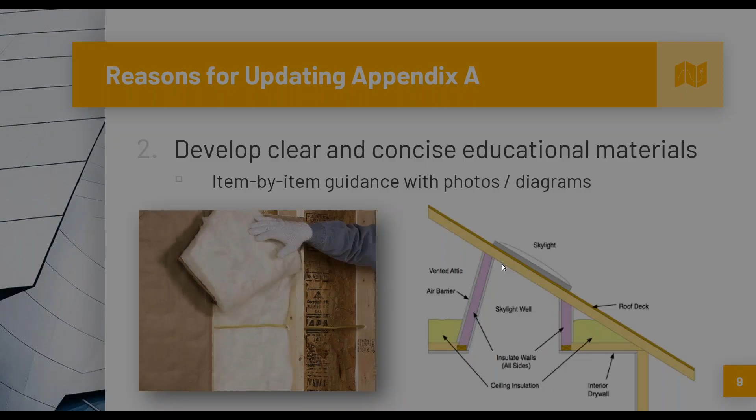Now, in terms of educational materials, the insulation industry is committed to creating an informative guide that aligns with the requirements of the updated standard.

This format that we're proposing will make it much easier to create that guidance for each of the installation types. Item by item, we provide pictorial and additional informative language to the requirements. Things aren't subjective within this update.

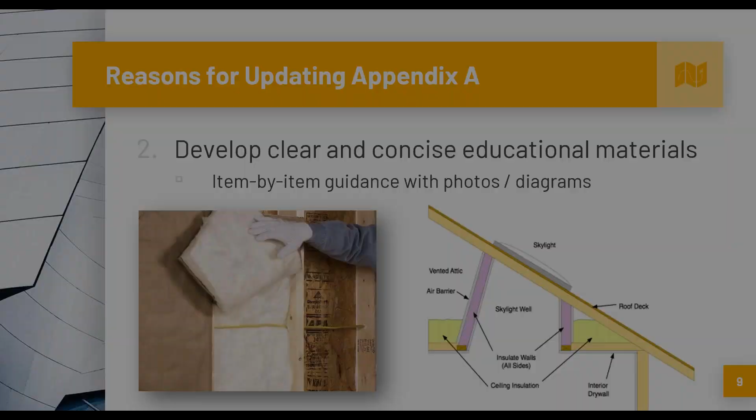And then lastly, in terms of alignment, moving to a pass-fail, properly installed, not properly installed designation, along with language changes for the installation types, will bring it more into alignment with both manufacturer's instructions and ICC requirements. Like I said, that third point, bringing things more into alignment. All right, so those were the reasons that we had behind the changes that were being proposed.

I want to provide you with a little bit of background on how we went about making these updates. So we put out a notice that we were making an update through RESNET and brought together raters, builders, and product manufacturers to draft the new sections. So we created subgroups that were focused on drafting requirements for each installation type. And we met monthly as an overall group to report out progress from each of those subgroups.

So Robbie did a great job of creating some guiding principles for those subgroups to use as they formed their requirements. It really helped improve consistency between each of those sections. And of course, we tagged existing resources that I'll talk more about in a second here as guidance in creating each of those sections as well.

In terms of makeup of the group, we had over 30 participants that consistently came to the meetings: builders, raters, energy efficiency organizations, installation representatives, and even ICC staff would consistently join. So it represents a pretty good cross-section of the industry. This standard that's being proposed was not written in a vacuum by one party, but was a collaborative effort.

And then in terms of existing resources that we used in pulling together the updates, the source for manufacturer's instructions, we looked to the California QII requirements, language within the IECC, and we used all these resources along with great input from all of the members of each of the groups. Information from the field from raters and builders, those all form the basis for this update.

So now that I've given some background, I'm going to turn it over to Robbie to talk about some of the changes that we've got going on. So Robbie, you can just tell me when to move along and we'll get going.

Perfect. Thank you, Charlie. And before we jump in there, I just wanted to add 2 things with regards to rationale for going down this path of changing the grading standard, with gaining alignment with the code and the informative aspect of what can be achieved after this is approved, hopefully at some point in the future. If you look at the code, you see that primarily the energy code is looking at manufacturer's instructions for how you install insulation, with some additional guidance within the code.

And what we see with manufacturer's instructions is that they can't make an instruction that says install the insulation kind of good. It's either installed well or it's not installed well. And so to get that alignment with code and industry practices, it really makes sense to move to that kind of language.

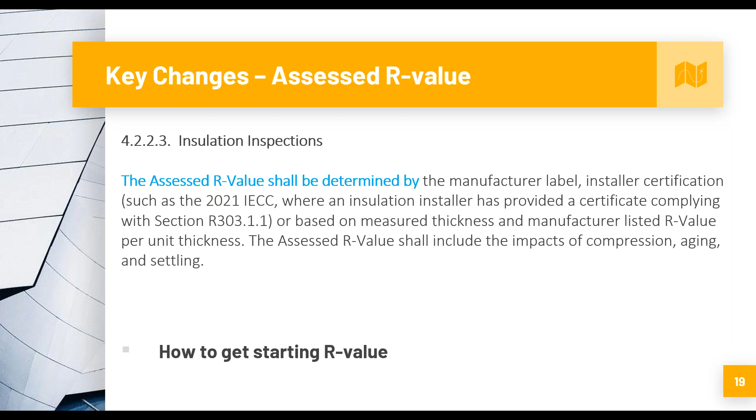The insulation in the energy rating reference home enclosure element shall be modeled as properly installed. So this is the guidance to the software about how the reference home is determined, and it shall be inspected in accordance with normative Appendix B and evaluated in accordance with normative Appendix A. So the inspection process in B is getting at, again, determining the R value of the material, and Appendix A is getting at how you actually grade it as properly installed or not properly installed.

There have been some changes to both, Appendix B and A. The primary changes in this move are to Appendix A. So you should look at both, look at the entirety of the proposal, if you're going to make a comment, so you can comment on both.

When insulation is confirmed to be present but not fully inspected, the insulation shall be modeled as not properly installed. This is consistent with what we currently are doing. If you can't fully see the insulation, you can't make a determination of whether it's been properly installed or not properly installed. So in the past, you would grade it as grade 3. Now we've replaced grade 3 with not properly installed. There are some exceptions that have been maintained, and you should look at those exceptions. Next.

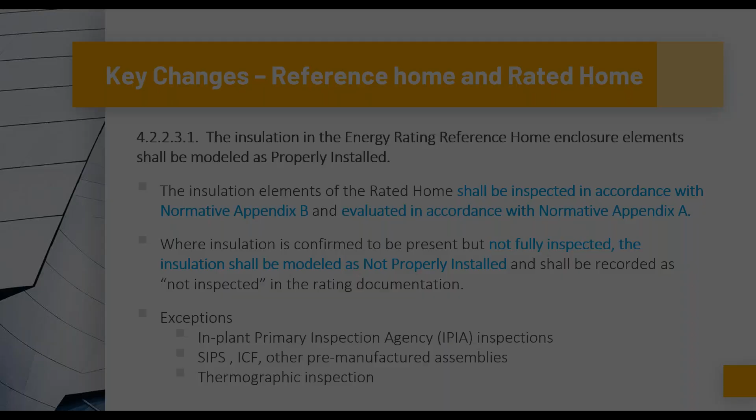The insulation assessment section is talking about insulated surfaces categorized as properly installed shall be modeled with the assessed R value. So again, getting at that notion that you're determining the R value of the assembly that you're going to model and enter into the software first, and then you're going to grade it as properly or not properly installed. The footnote here is talking about the R value entered into the software, so it's again a reminder of what you're actually determining here, what the R value is and how it's going to be used. Next.

Insulated surfaces categorized as not properly installed shall be modeled with the assessed R value that is determined in accordance with Appendix A for 90% of the insulated surface area and no insulation R value for 10% of the insulated surface area. So this is giving guidance to the software for how to generate the actual energy model. It's consistent with what we're currently doing. However, in the past, you would use 95% of the insulated surface area and no insulation for 5% of the insulated surface area for not properly installed, or grade 3. So this is a change.

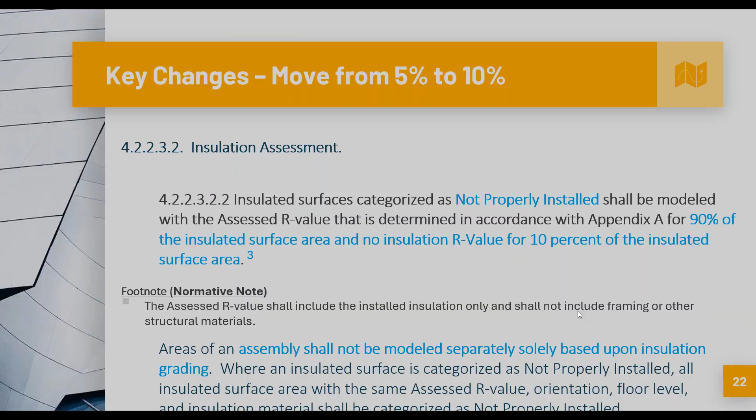There we go. This section is talking about insulation: surfaces categorized as uninsulated shall be modeled with an R value of 0, which is pretty straightforward. Insulation grading should not be applied to this section because you're already entering it as not insulated. You don't need to grade that install. So that's consistent with what we're doing currently. Next slide.

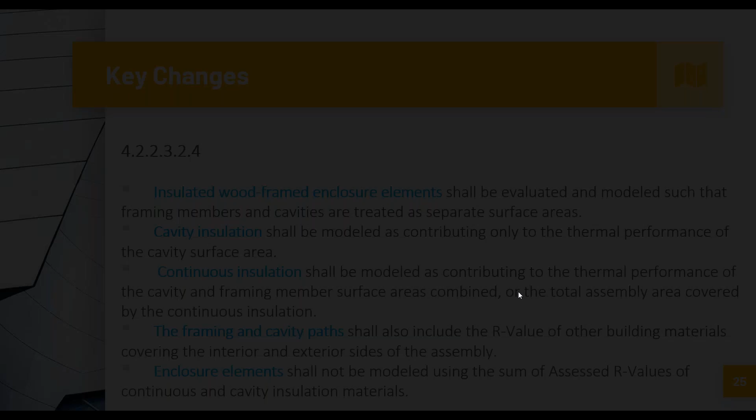The modeling guidance offered here is consistent with what's currently in the standard for other building assembly materials, basically getting their R values through the ASHRAE Handbook of Fundamentals. Next slide. Same with insulated wood framed enclosure elements, cavity insulation, continuous insulation, the framing and cavity paths and enclosure elements. These are other areas of assemblies that have to be modeled, and the modeling guidance really hasn't changed for these assemblies. Next slide.

However, there is fibrous batt insulation where the industry has created compression charts. So we needed to make it clear that for this specific insulation type, if, for example, you have an R19 batt and you put it into a nominal 2x6 wall, you have to compress that batt by about ½ an inch, and it changes its R value from 19 to 18. Therefore you would have an adjusted performance R value that you would actually input into the software before you begin your grading process.

So fibrous batt insulation is unique in that when you compress it, it changes the R value, and there are compression charts available from the industry. So we wanted to make it crystal clear that you're assessing the R value first, and then you're grading that installation. There are two different things happening, so that you're in essence not impacting the software twice. You want to get the right R value, and then the impact on the software in terms of grading happens through the nomenclature of properly installed or not properly installed. Next slide.

All right, so planned next steps. This proposed standard change is out for comment now on RESNET's website, through the 14th of October. We look forward to your comments. Even if you have comments that are not changes, we would love to hear from you and engage with you on getting good content for the informative guide that will be created after the completion of this standard.

Just given the quantity of comments we expect, I think it will go through multiple comment periods. So we'll respond to those comments. Hopefully by the end of this year, we'll do it, maybe early next year. We'll have the next comment period going, and we can finalize this here in 2025. And then, as I mentioned, we want to create that informative guide.

So the insulation industry is interested in leading the effort to create that resource for raters. We want to have things be very clear and concise within that. So we would really like your engagement on the development of that as well. With that, that's all we had to present today. Looking forward to your questions.

This is basically modeling guidance for the layered pathways of the assemblies that are modeled in homes. So you get your cavity insulation R value, for example, and then the other components of the assemblies, you would get the R values through the ASHRAE Handbook of Fundamentals.

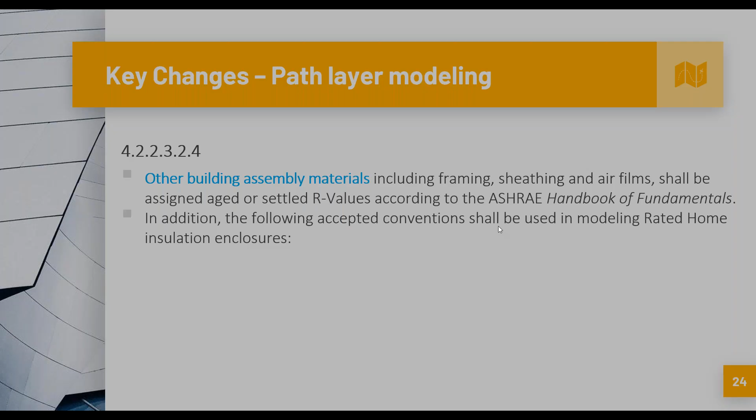When you talk about the insulation industry, are we talking about the SPF rating from the American Chemistry Council? I think I'm reading that right. Laurel, can you help me out with that one? Yeah, I'm not sure. When we talk about the insulation industry, it's all manufacturers of different types of insulation. So that would include spray foam, rigid foams or rigid materials, fibrous materials. And reflectives as well. All the different manufacturers of those materials. Yeah, all the manufacturers were included as reference points, correct? Yes. Okay.

Okay. What is the reasoning behind having separate wall entries for different orientations? Raters have enough issues modeling walls as is. This could be increasing the likelihood of mistakes being made. Any thoughts on that? There's no requirement to make entries for different orientations of the house for walls, for example. What the guidance is, is when you are allowed to make a separate entry.

So the guidance is saying you need to evaluate more than just the insulation grading. You have to also evaluate the orientation of the assembly, basically the consistency of the install. And if that consistency changes per orientation and affects the R value, affects the other things, then there's guidance for when you would make a separate entry. The standard isn't saying that you have to make separate entries. It's saying when you should and when you shouldn't, in essence.